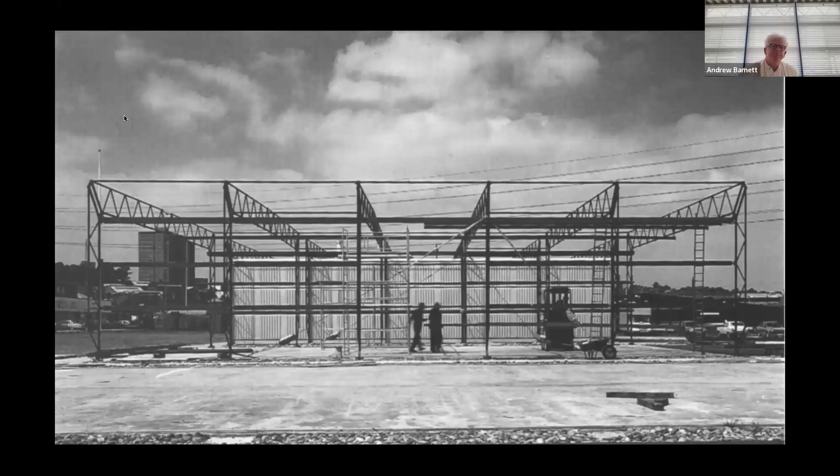This is not Eton and it's not timber, but it is our office patera system that we currently occupy. It's just celebrated its 40-year anniversary, and I thought it was quite interesting because in thinking about the project recently, it sets a whole number of themes, which is quite interesting to see how its genealogy has kind of lasted through 40 years of practice.

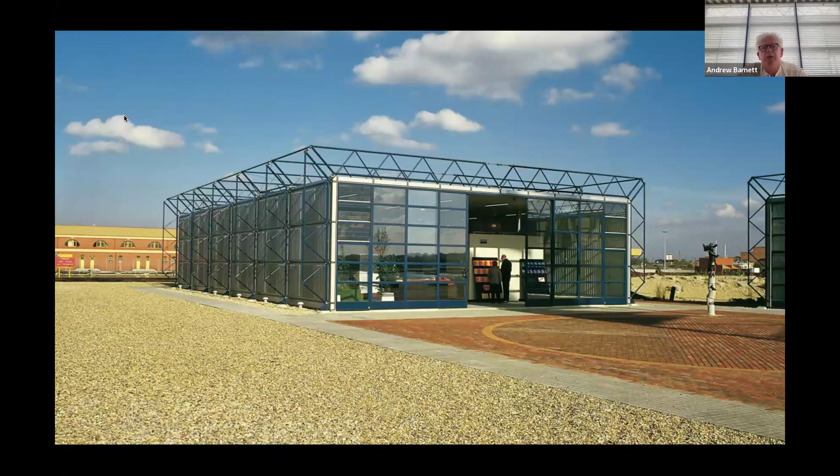So this was a patera system, light industrial system designed by Michael and Patty Hopkins in the 80s. It's a dry construction, everything's prefabricated, so it's a super accurate construction. It is a kind of simple rectangular box form, so that the simplicity of the form lets the construction read through, and the craft of the building becomes, if you like, the architecture of it.

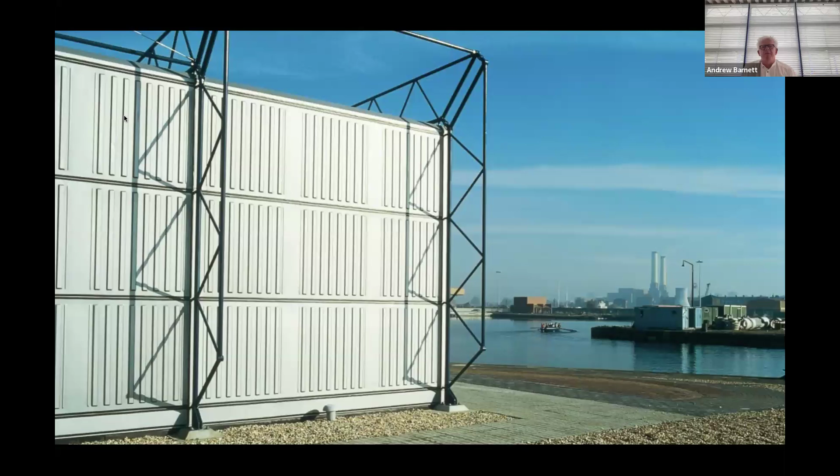It's also, this one was built in the Docklands, sitting right by the waterfront. I never visited this building, but Patty talks about how that amazing fully glazed elevation, so no punched windows either, it's just the glazing becomes an entire facade. And she talks about how it really unites the interior of the building with that waterfront setting. And then perhaps most importantly, the idea of that independent expression of structure and envelope, giving a real legibility to the way that the building has been designed and engineered.

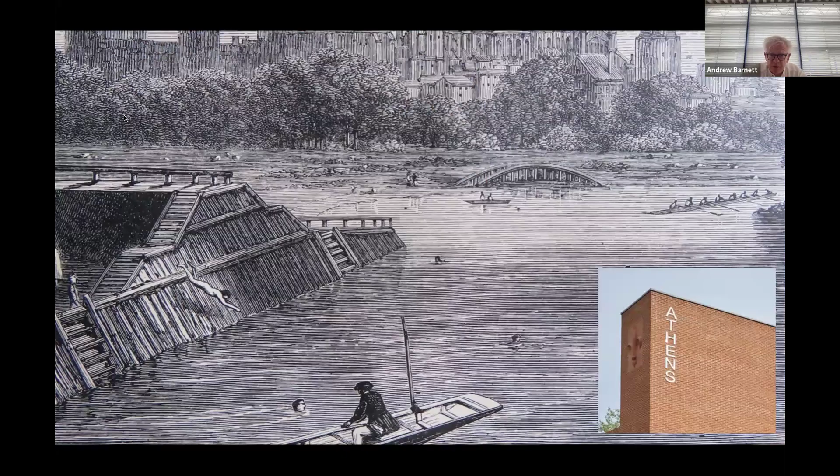So the story of Eton for us sort of starts with understanding a bit about the history of swimming at Eton. Back in the day, the boys used to swim in the Thames on a bend of the river called Athens. Hence, the name of our building now is called the Athens Pool and Sports Hall.

And then they recreated the bend in the river in this outdoor swimming pool. In this clearing in the trees, from the excavations from the pool, they created a bund or raised bank, which they planted to become this kind of private swimming place. But decades later they decided they needed an indoor pool, so they built that, which meant the old pool fell into dereliction.

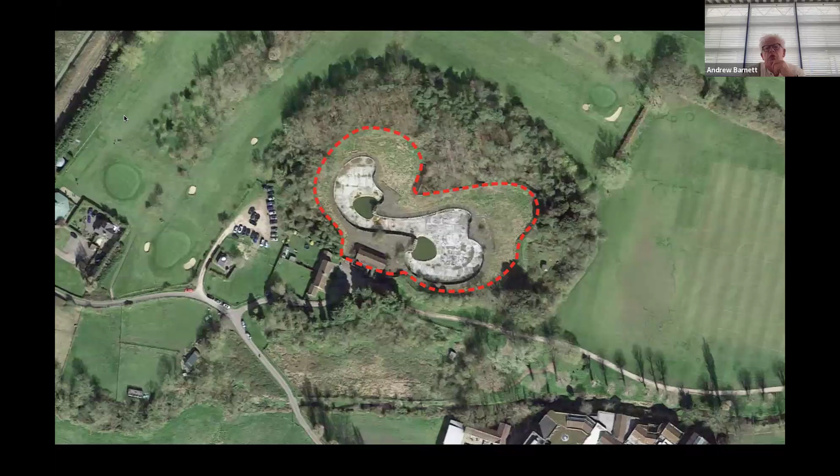And here it was, as we saw it when we came to the college. When we first visited, this was the sort of scene that greeted us, a deserted site surrounded by an overgrown landscape and a dried up, failing external pool.

But it did give us the idea of the excitement of discovering this site as a kind of lost garden, or a walled garden in a country house, where you walk through a threshold and find yourself in another kind of place with another kind of feeling. That's the inspiration of the overall design.

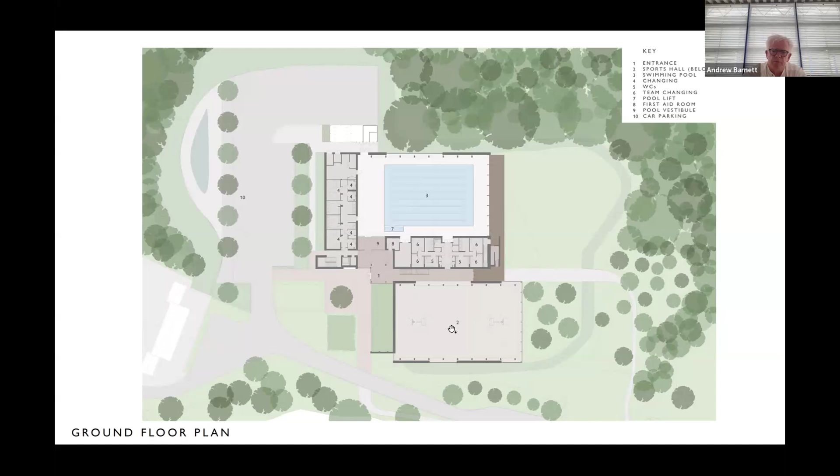The site is metropolitan open land, so that's when this idea of timber comes through. Building these big spanned spaces, we had to find a way to create an economical structure, building two flat roofs, sinking both volumes into the ground, keeping that roofscape below the trees, so the building is still effectively hidden from the outer landscape and environment.

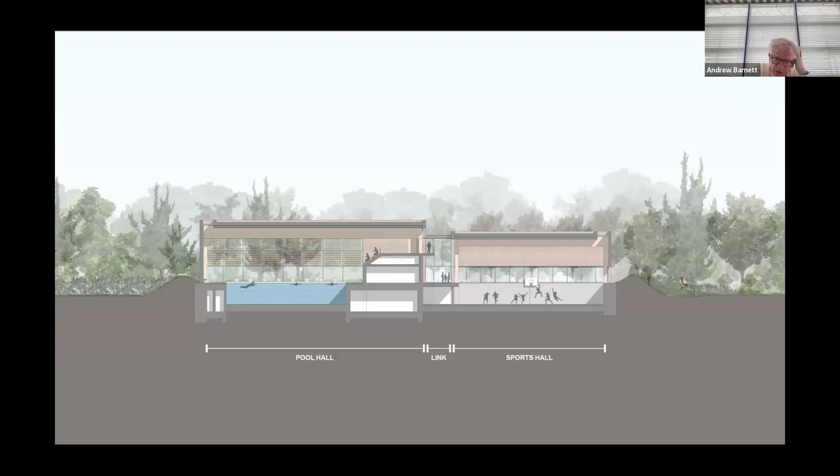The really nice thing about that was that the surface of the pool became level with the landscape around it, with a grand window between the pool and the informal garden, which you can see at the back of that drawing. There's a really nice feeling of connection between swimming in the pool and the landscape, which is of course a reference and memory to the idea of the external pool, literally swimming amongst that landscape.

This is the development of the form from simple rectangular volumes, split apart and slid apart, with that link cutting through it, with then a formal series of walls making a garden at the front, a stair tower and a lift tower, celebrating that sense of arrival.

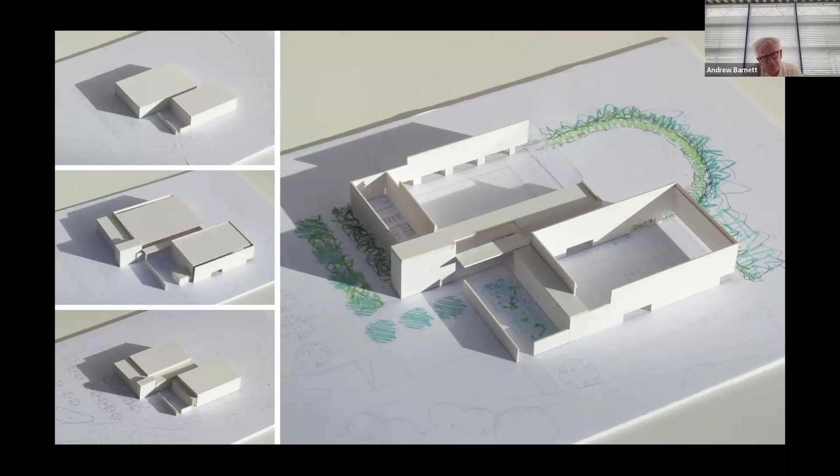And then the idea of taking these simple volumes in brick and cutting holes into them to enable that relationship to read through between the internal environment and the landscape around it. And here's the grand section through the building.

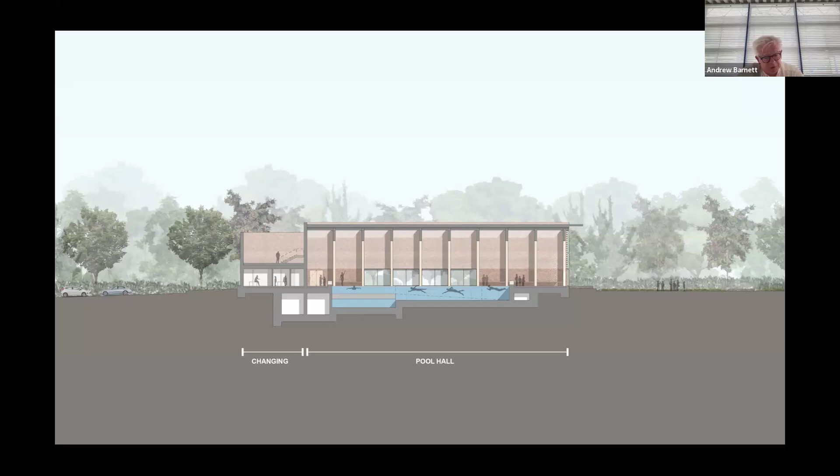These big double height columns through the pool, you can see it level with the garden. These big glulam spruce columns marching along the pool at 4-meter centers, forming this flat roof sitting below the roofscape. So really simplifying the building, like Patera in a sense, to these 3 or 4 elements: the structure, the glulam, the brickwork envelope, the glazing opening the building out to the landscape, and the landscape itself.

And so from concept and design to finished product, I feel it's a very clear development. You can see in this photo of the finished building the timber structure, these massive 1.6 glulam beams that span across the whole width of the pool, and then opening out that western elevation to the informal garden beyond.

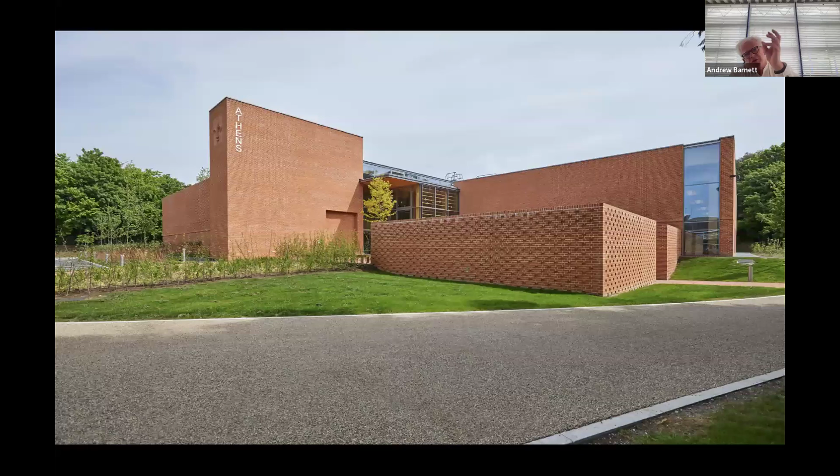So if it's informal and open on one side, it's a much more closed and solid building as you enter it. The idea of the stair tower marking the entrance, the sports hall slid back to make that front garden, where you get the first sense of the connection with the timber coming through, and that glulam structure marking the entrance to the building.

As you walk through, you get this double height space that links the front garden with the rear garden, and you get the grandness of the scale of the glulam structure, cut open at roof level with these linear roof lights to bring daylight and sunlight into the building, really animating what can often be in this typology a simple sports shed, but thinking about it as raising the environment of the pool and the hall.

As you rise up the stairs to the viewing gallery above, you get this really intimate relationship with the grand scale of structure that surrounds these volumes.

You can see the way sunlight animates the shadows and light on the brickwork wall, that thin line of sunlight between the glulam column and the brickwork beyond. You can see these brave structural openings we made into the brickwork, connecting the interior of the pool with the landscape bund, just newly planted in this photograph, now much more mature and green, keeping the relationship of swimming to the outside landscape surrounding the building.

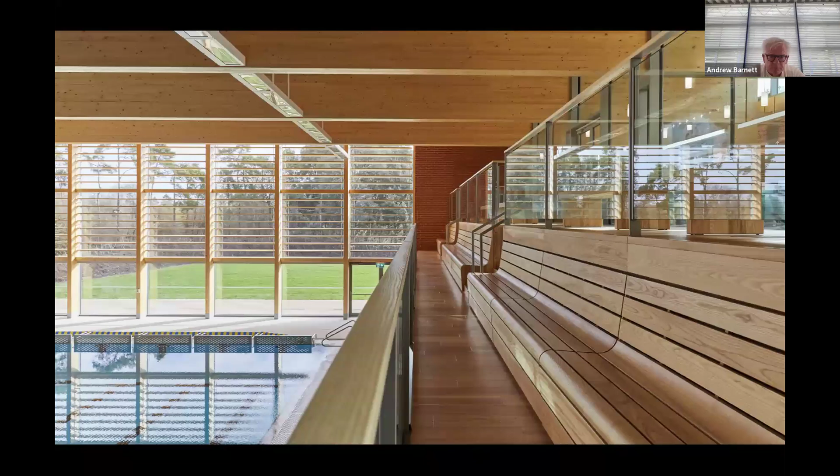The structural timber is obviously glulam, with CLT spanning between the glulam columns and beams. Then there's non-structural timber - these are ash, we made this ash seating for the gallery to look down onto the pool. They were inspired by Mersey ferries in Liverpool, which used to have these wonderful life raft benches on the upper deck of the ferry boats.

The link is this linear void between the two sporting volumes, which links the two garden spaces, but it also works in the opposite direction between the gallery above and the sports hall below.

You can see that it forms a kind of informal spectator gallery to the sports hall, from the upper deck to the cantilevered stair to the ground floor link. You get three almost free spectator galleries looking down into the hall.

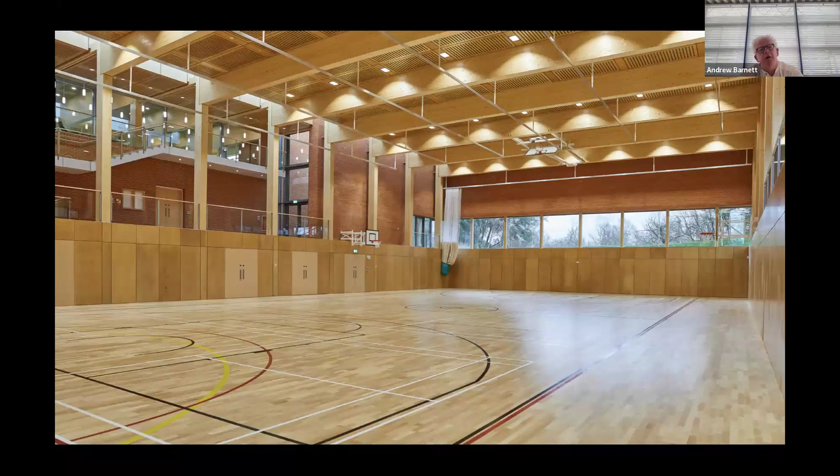The hall is sunken down, so it provides that birch face ply, giving a reflective surface for bouncing balls off on five-a-side football. And because that's at ground level, you get another window which looks out onto the landscape beyond and brings daylight into the heart of the building.

And finally, the informal garden, where both volumes really open up, finishing that story of the relationship between swimming at Eton and a green landscape. I hope what we've made is not some dumb boxes, but something intimately connected to both the history of swimming at Eton and its place in the landscape and the college campus.

Thank you very much. That's a brief intro to the project.

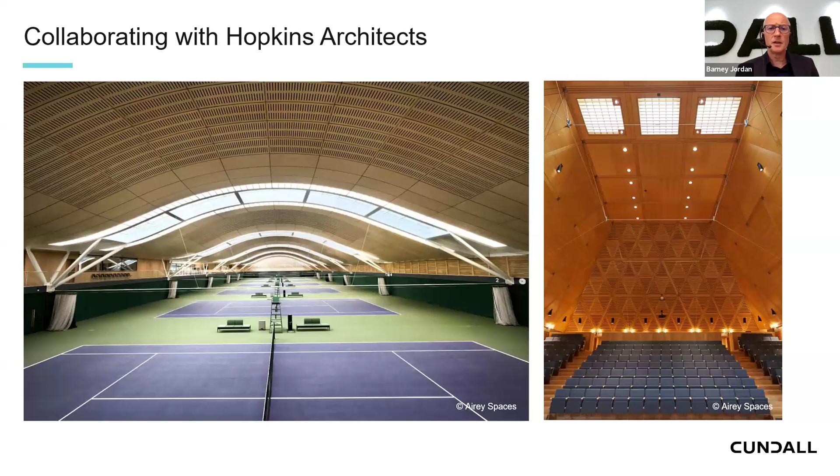I've worked an awful lot with Hopkins, an awful lot with Andy, and that's helped us develop a relationship that's been very helpful in delivering this Eton project. Just a tiny little bit about Cundall.

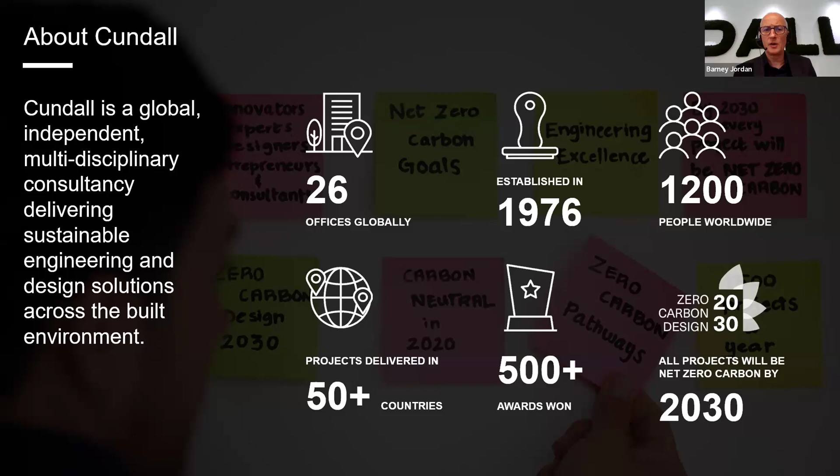We are over 1,200 people now, and we have 26 offices dotted around the world. In terms of disciplines, we offer a big range of basic core engineering disciplines, but also a lot of specialisms that have been utilized in this project. So in no particular order, we've done building services, acoustics, civil engineering, fire engineering, geotech, lighting, sustainability, and most importantly, structural engineering on the project. It's meant that it's been a really collaborative, multidisciplinary effort across the entire piece.

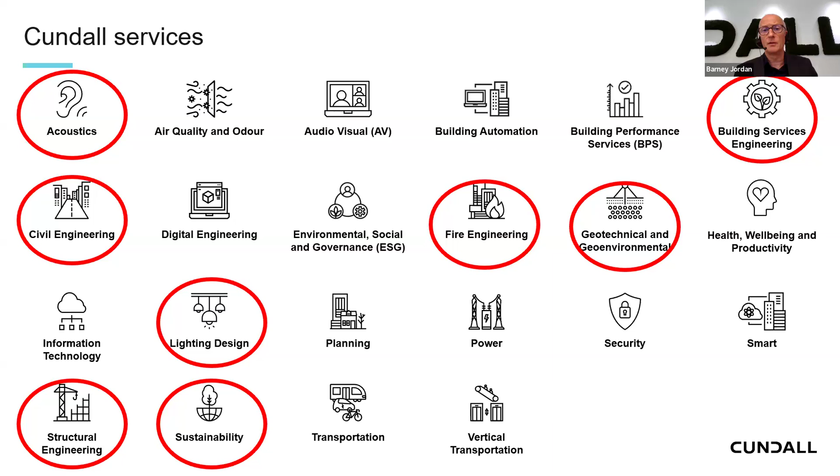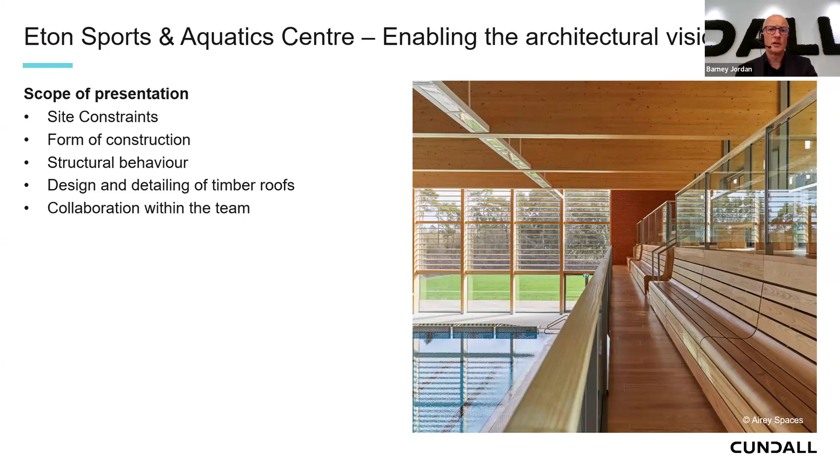Obviously this talk is mainly about the timber elements of the building, but I thought it would be useful to set the context, and what Andrew said is useful in terms of the overall vision for the building. I'll talk a little bit about the site constraints, the form of construction that meets those challenges, how it's designed structurally, and some of the detailing and design of the timber roofs. And most importantly, the fact that this is a team effort - we've had a lot of collaboration between the architecture, the contractors, the construction, and the engineering.

The site in Eton is a challenging one. It's near the river, near a number of rivers. It's in flood zone 3, which means it can fully flood, and we have to allow not only for today's conditions but what might happen due to future climate change. On top of that, there's a challenging geotechnical stratigraphy and a very high groundwater table in the area.

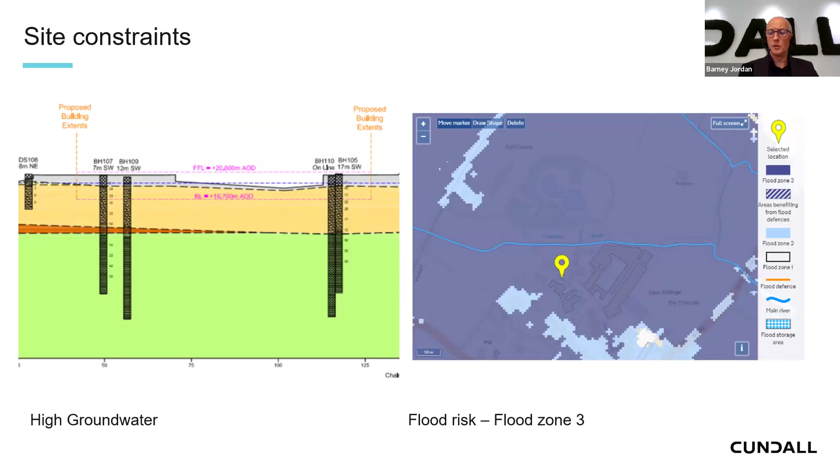This actually sets two challenges. As Andrew mentioned, the idea was to push the buildings down into the ground to slightly mask the building mass. But of course doing that has a number of engineering challenges. The first being in the long-term design condition for the building, we actually have to stop it floating out of the ground, and that's particularly pertinent with high groundwater level. In the event of a major flood in this area, the building would literally want to try and pop out of the ground like a boat. So that's one of the challenges we faced, holding it down.

The other challenge was to do with the fact that during construction, we had to excavate and remove the existing swimming pool structure, then dig a large excavation into the ground and keep that dry enough so they could build the new structure.

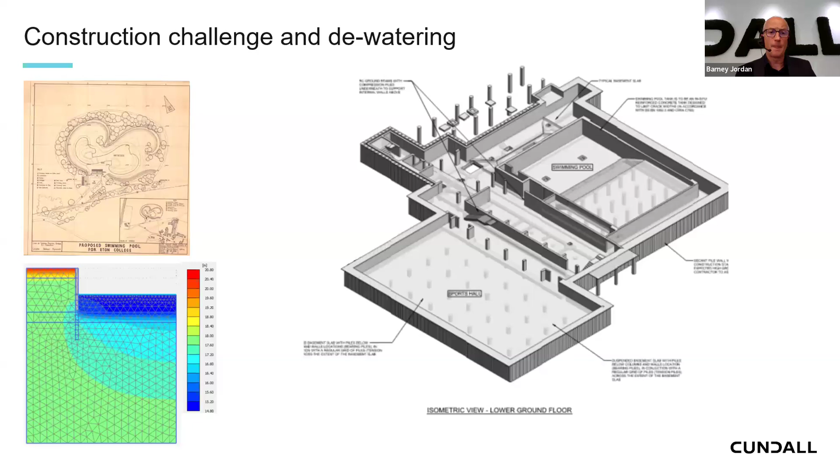The substructure is formed of a secant piled wall box. The piles go down to a stratigraphy that's basically fractured chalk. It's often in our region, southeast of England, that we get into clay, which forms a nice seal against groundwater level. But the fractured chalk actually means that water will continue to flow through the ground into the excavation as you build it.

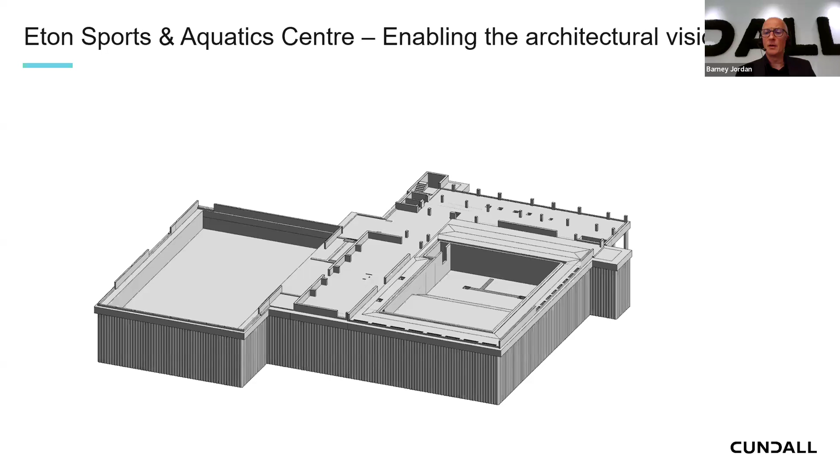To counteract this, the main contractor, Graham Construction, set up an array of well points across the building footprint. These basically extract water out of the ground and pump it to a remote location. Part of the Environment Agency's conditions on this was that we re-injected the groundwater back into the ground in well points remote from the site, so there's no actual net lowering or raising of the groundwater in this area.

Above ground, as Andrew mentioned, the facades of the building are largely punctured with big openings to allow light to come through and glazing to be formed. It's particularly noticeable that there's sort of a complete opening on the east elevation of the sports hall, and there's a very, very large opening on the east elevation of the pool and down the side.

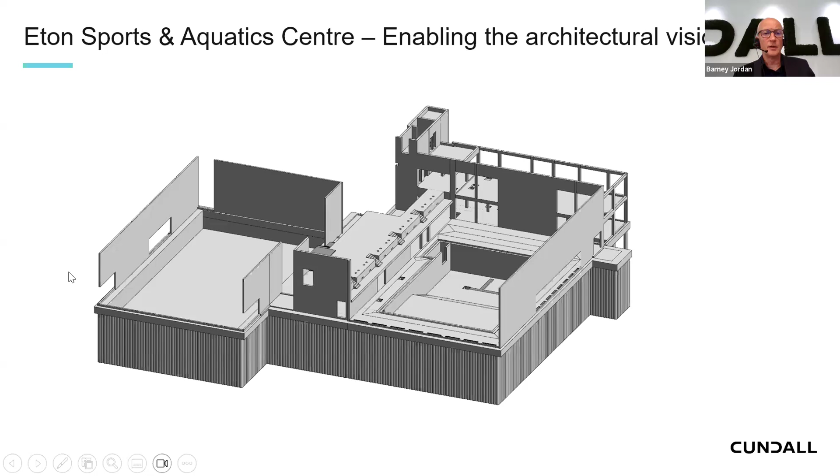To achieve this, we came up with a very clear structural diagram - we've provided thin, slender, reinforced concrete walls that not only restrain and support the brickwork but also act as shear walls to provide overall stability for the building. They also act as deep beams. On the right-hand side of the pool, there's a very large slot cut in the wall so it acts as a very deep beam to span over that. In the sports hall, these ends actually act as a deep cantilever.

The roof structure is formed of glulam beams supported on perimeter columns at approximately 4 meter centers. These beams act to laterally restrain the concrete walls about the minor axis of the concrete, and the wall in turn provides lateral restraint in the long direction, acting as shear walls.

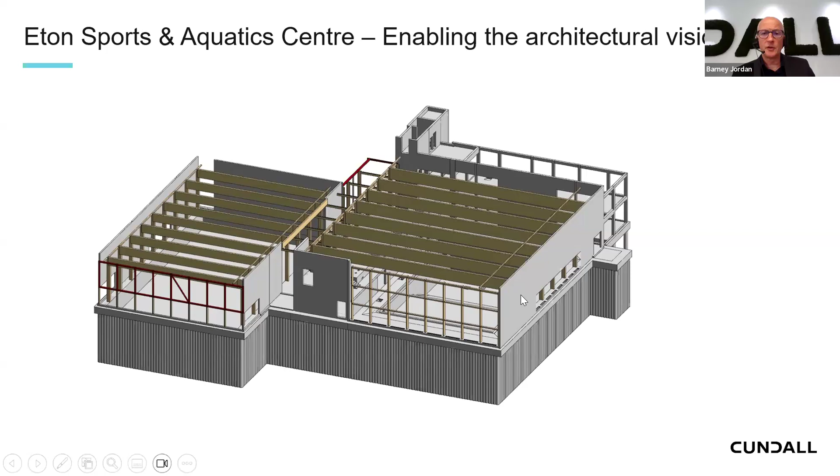The stability diagram for the pool and the buildings relies very much on the fact that you've created stiff walls to form a box and a rigid diaphragm to join all the walls together. For the sports hall building, this was particularly tricky because we've only got walls on 3 sides, which normally, a good stability diagram has walls on opposing faces, more like a big rigid box.

This diagram still works, but you do very heavily rely on the roof acting as a rigid and strong diaphragm. So as part of the design, we introduced in-plane bracing into the roof to help transfer those forces.

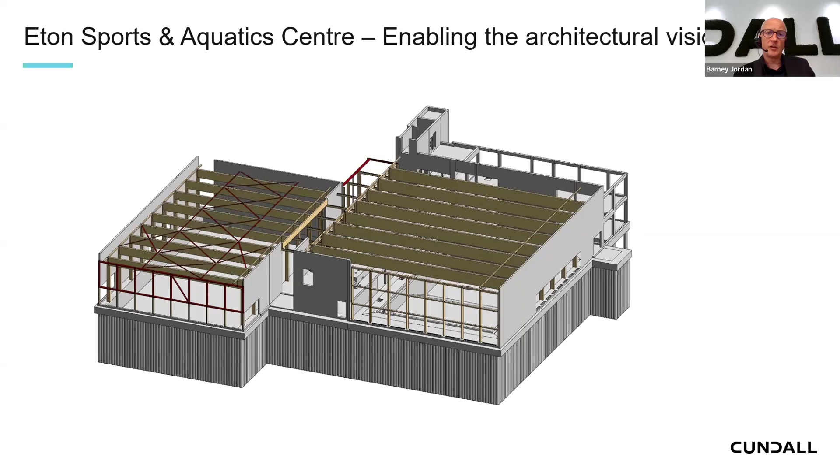Interestingly, once WIEHAG were on board as a contractor for these elements, we worked very closely with them, and we were able to justify the fact that the CLT roof panels were strong enough and especially stiff enough, combined with their fixings, to allow us to eliminate this bracing. That afforded a cost and program benefit to the project.

This image just shows the CLT roof panels in place. It's worth noting that the CLT doesn't always reach the perimeter walls, and there are large slots cut into the roof, which is also part of the rooflight glazing system.

Because the 2 buildings are effectively independently stable, we actually had to structurally introduce a movement joint down the link building that Andrew talked about. That came with its detailing challenges, as you can imagine.

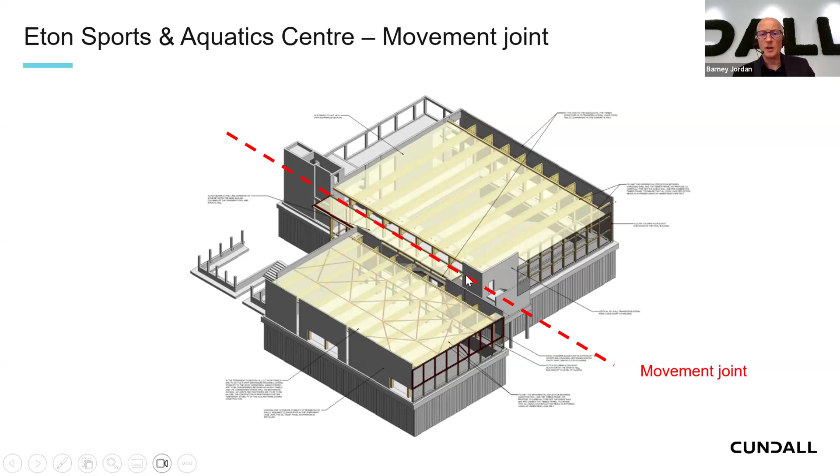Just talking about the different design conditions of the 2 buildings. Starting with the sports hall, on the roof we had a green roof, and there's quite a number of suspended sports equipment on the underside. So the roof had to be designed for the loading of that.

The environmental conditions in there are fairly benign actually, so it's a service class 1 design condition for the timber and corrosivity category C2. The pool, on the other hand, is very different. We designed that as service class 2 and corrosivity class 4.

The roof to this also supports an array of PV. It's worth noting that some of the timber actually passes from inside to outside, and there's a projecting cantilevered canopy along here, and also above the entrance area that was shown in some of the earlier images.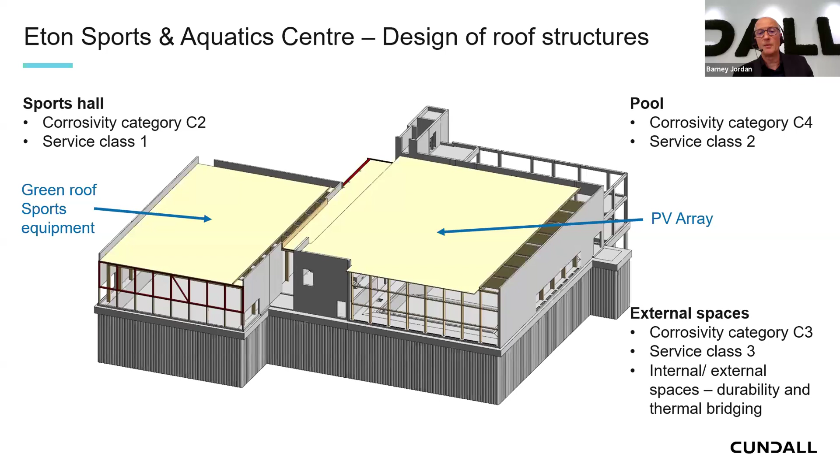Timber obviously is very good from this perspective because it's inherently durable, and it also doesn't suffer in the same way that steel or concrete would in terms of needing thermal breaks.

As I described, the stability diagram for the building, this is just showing the pool hall as an example, but it uses the shear walls around the outside of the building, the roof acting as a rigid diaphragm. This slot down the side of the building is actually structurally a bit challenging because the diaphragm doesn't actually meet the shear wall that it relies on.

So we actually had to design these glulam beams to take the diaphragm force in minor axis bending back to the concrete wall.

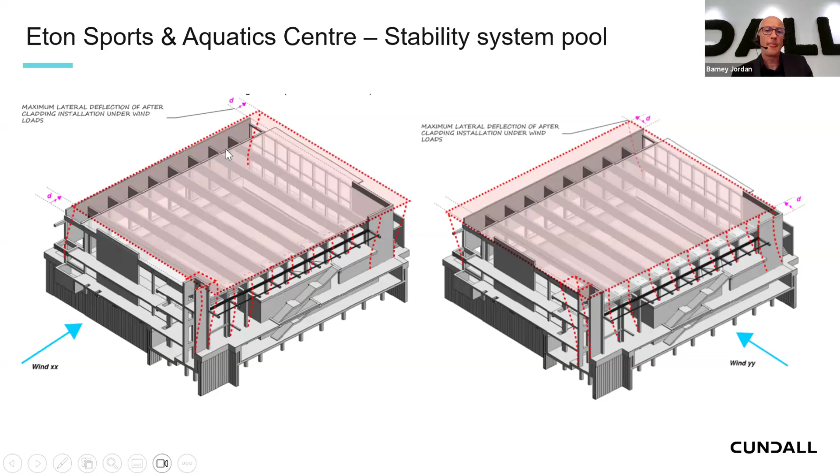This is just a general cross section across the two buildings. The sports hall is approximately 20-meter span with 80mm thick CLT decking on it. The beams there were 320 wide and approximately 1200 deep.

The pool hall is a much bigger span, 31 meters, with thicker CLT roofing on it. The beams there are circa 1700 deep. All the glulam beams and columns were grade GL28C.

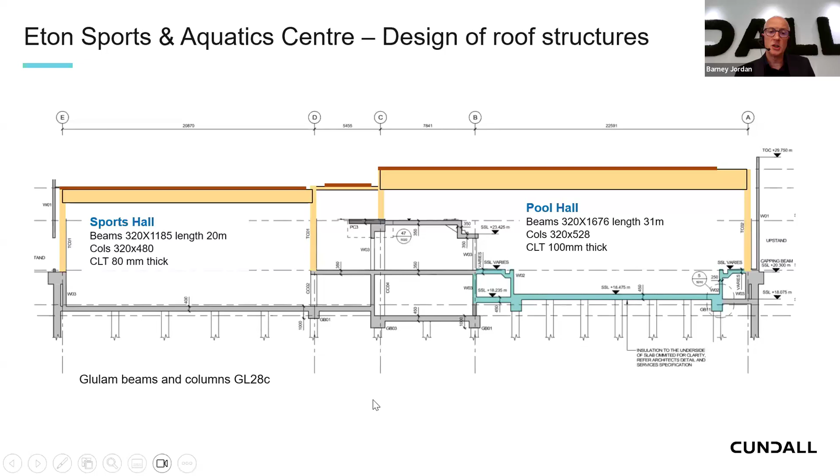I just thought it'd be worth talking a little bit about some of the detailing here. These drawings are from our design drawings. It's worth pointing out that post-contract, we worked very closely with WIEHAG to refine these details to suit their preferred methodology and also to take benefit from their specific expertise in how you join bits of timber together.

This detail on the left-hand side here shows the connection that Andrew was talking about, where there's a distinct gap between the glulam and the brickwork and the concrete wall behind. The way this works is the column has a sort of L-shaped rebate cut into it, which then means that the beam sits directly on that. The load from the beam is then transferred in bearing directly down.

The bracket detail that you can see here connects the concrete wall with the end of the glulam beam, but it acts as a lateral restraint to the concrete wall in the left to right direction, while the concrete wall acts as a lateral restraint to the glulam in the into-the-page direction.

Another subtle requirement is that whilst the glulam is laterally supported at the top flange by the CLT decking, we needed to provide torsional restraint to the glulam beams at the ends in order to resist lateral torsional buckling. This detail was the way that we did that.

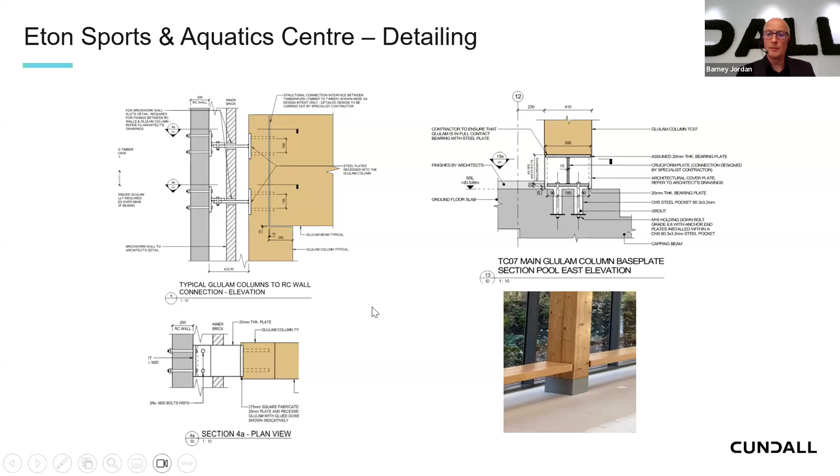The link building has a flat roof, partly CLT decking, partly glazed. They're supported on very slender flitched beams which span between the sports hall and the pool. At the interface with the pool hall we had to introduce a movement joint, which added to the complexity, but the visual intent we matched has worked very well in this instance.

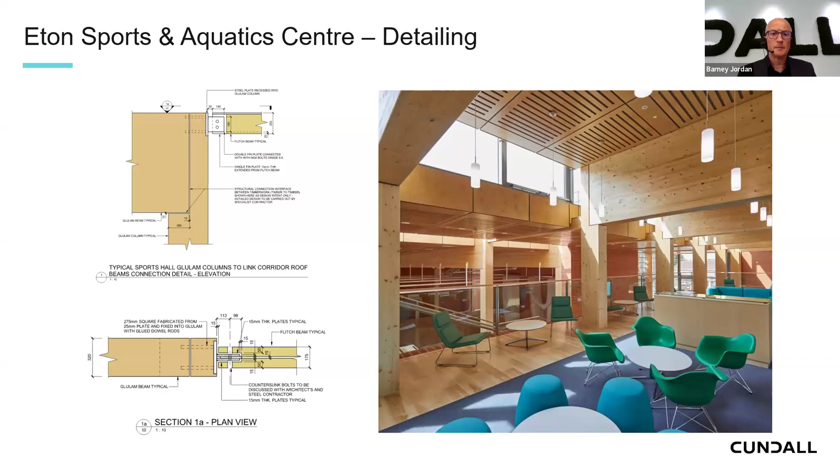One of the key structural challenges for us was actually working out how much these roofs would deflect at an early stage in their lives, and over time, how they would creep.

There are particular challenges where these interface with other elements of the building. Partway along the viewing gallery there's a full height glazed screen that interfaces with the roof beams, so we had to work out how much the interface detail would have to deal with in terms of deflection, tolerance, and all those sorts of things.

Calculating pre-cambers on these big timber elements is really tricky. It's part calculation, part black art based on experience, and we worked very closely with WIEHAG to come up with a strategy for pre-cambering. This photo, bottom left, shows the beam lying on its side - you can just about see the pre-camber that was needed.

The idea is that you erect the beams, put all the load on it, and by the time they come to install the glazing it's in a predictable position, and then the interface with the glazing can accommodate the further movement that will happen over time.

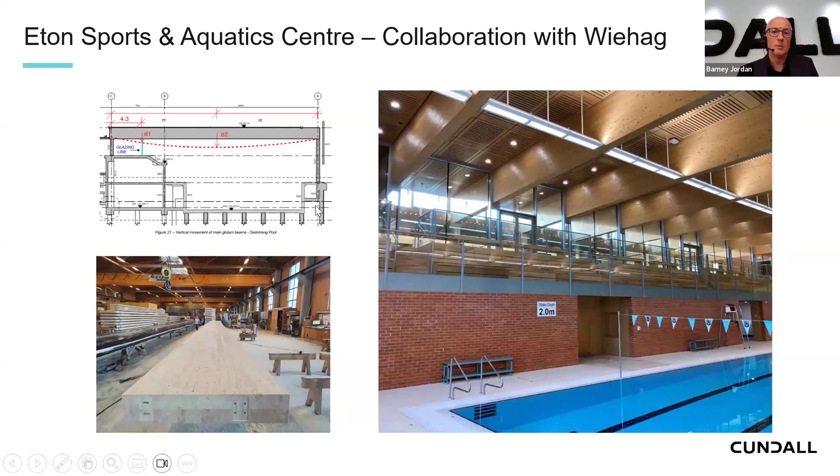I've mentioned collaboration with WIEHAG a lot, and it was really an important part of this project. Whilst we did all the initial design ourselves, when they came into the project - and I have to say they were very helpful even before they were in contract - we discussed material grades, exact section dimensioning, transportation and handling. John will talk a bit about this, but transporting a 1.7 meter by 31 meter long beam across a lot of Europe and then erecting it is a really challenging thing, so we had to understand if that could actually be physically done.

I've talked about diaphragm actions, connection design, pre-cambering strategy. The other thing they advised the design team on was the build-up and change of temperature and humidity in the pool building once the envelope is enclosed and the building has water in it, because you don't want conditions to change so rapidly that you cause splitting in the timber. So that was another aspect where we relied very heavily on their expertise.

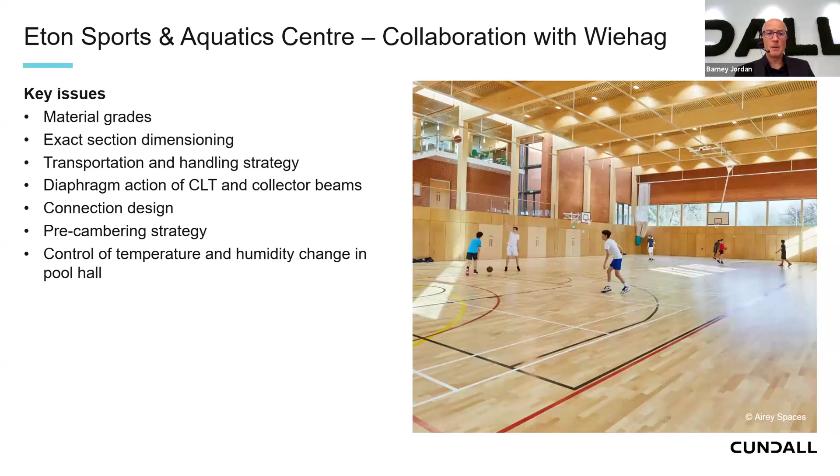At that point, I think I will hand over to John, who can talk about the WIEHAG aspect of the project.

Thanks, Barney. Okay, I'll just share my screen. Hopefully you can see my screen, everyone. Good afternoon, everyone. We can't see your screen yet. Oh, you can't? Oh dear, sorry. Hopefully it's working now. That's great, thank you. Sorry. Okay, thanks, sorry about that.

Firstly, a brief introduction to the company. WIEHAG, a long-established volume glulam manufacturer that started making glulam in the 50s, and by constantly pushing the boundaries we're acknowledged as one of the industry pioneers with this versatile product. WIEHAG is still family-owned and constantly reinvests in the business, as illustrated here on the right, where you can see we've recently put in a new 3-story office block and new hall, all in timber.

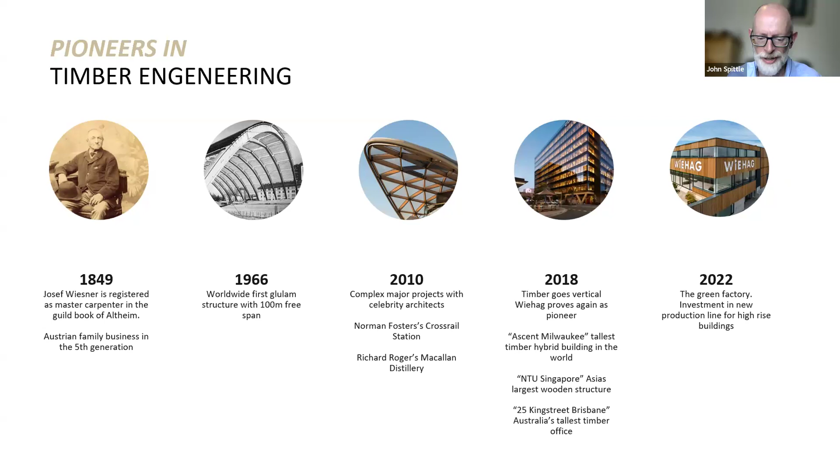This is our state-of-the-art factory in Northern Austria, situated near sustainably managed European forests, which enables efficient logistics and supply of the key raw material. Like most large European glulam and CLT manufacturers, WIEHAG has its own on-site power station which runs solely off our waste timber. This makes our entire production self-sufficient for heat, and over half our electricity comes from our on-site solar energy plant. Consequently, we're not affected by volatile energy prices to anything like the same degree as other products such as steel and concrete.

WIEHAG are not just a project management company or supplier. We offer detailed design, manufacture, supply and installation, and this includes providing cranes and chutes. This makes us look at a package in a much more holistic manner, which is really important for achieving successful completion on complex projects like the Eton project.

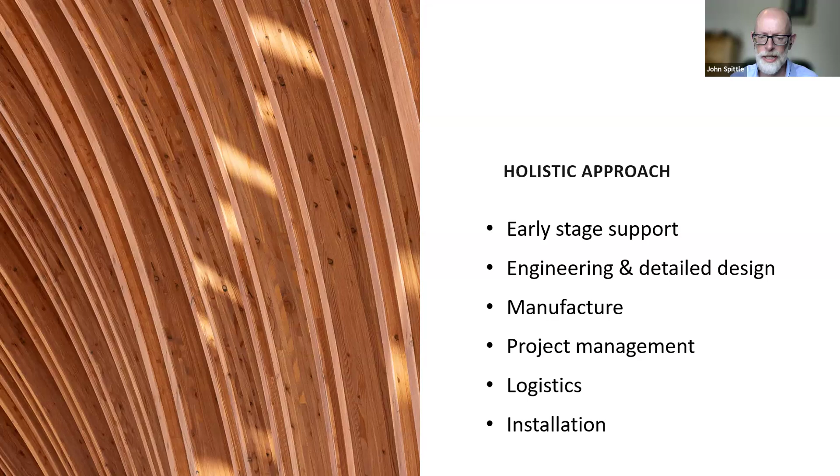We've been successfully delivering numerous groundbreaking projects around the globe in a variety of sectors for a good few years now, and we're constantly seeking to raise the bar in terms of scale and complexity, while still retaining core values like quality, safety, service and value.

Just to give you an idea of our capabilities, we simultaneously manufactured and delivered the glulam members and connections to both the largest timber building in Asia and the world's tallest hybrid timber building. All of this was carried out during the pandemic, with the added distraction of a ship getting stuck in the Suez Canal.

Introducing the package that we did, the scope really. Andrew and Barney have talked through the architecture and engineering, so I'll touch on other aspects of this great project. As Barney has touched on, the importance of having the right team - and for this project, it really was spot on. In addition to the collaboration, the early engagement of key subcontractors, such as ourselves, really did help the project in spite of all its challenges.

I think it was late 2018, we began providing initial design and cost input to the team and assisted them in developing the design. Then there was a really rigorous tender process, ending with us being appointed with Graham's in early 2020. We then commenced the detailed design process in collaboration with the design team and Graham, and this included providing a large scale mock-up of the glulam and the CLT.

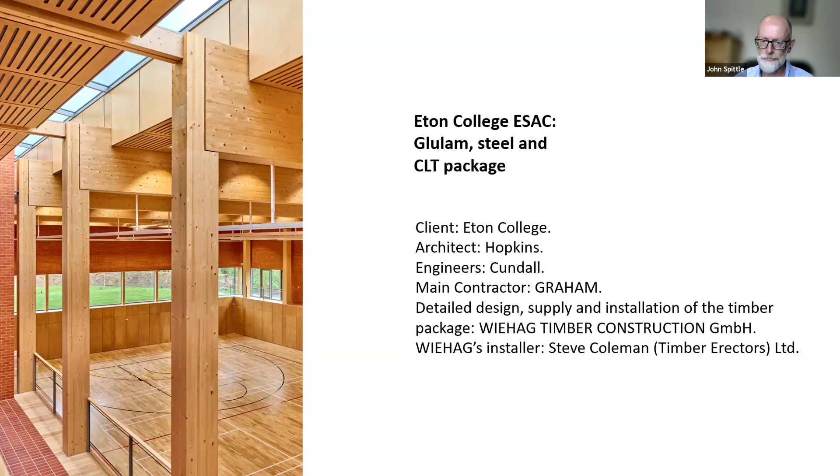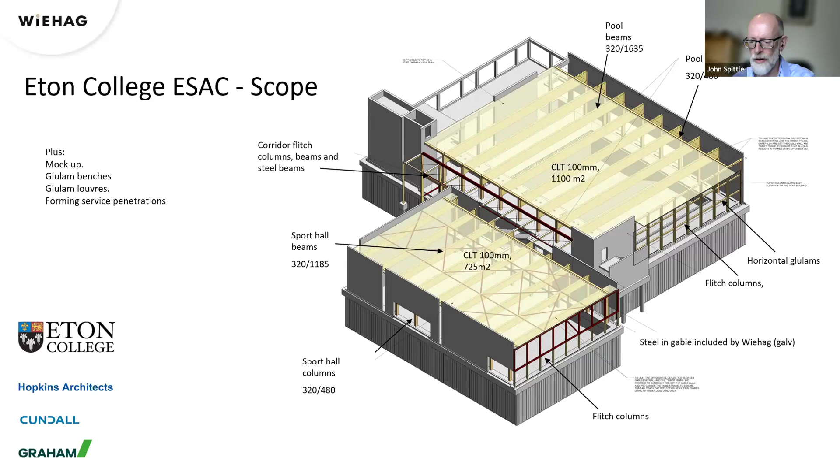The scope of our works consists of the detailed design, supply and installation of the glulam columns and beams, CLT roof slab, the glulam benches and louvres, plus steel members, including the hybrid flitches.

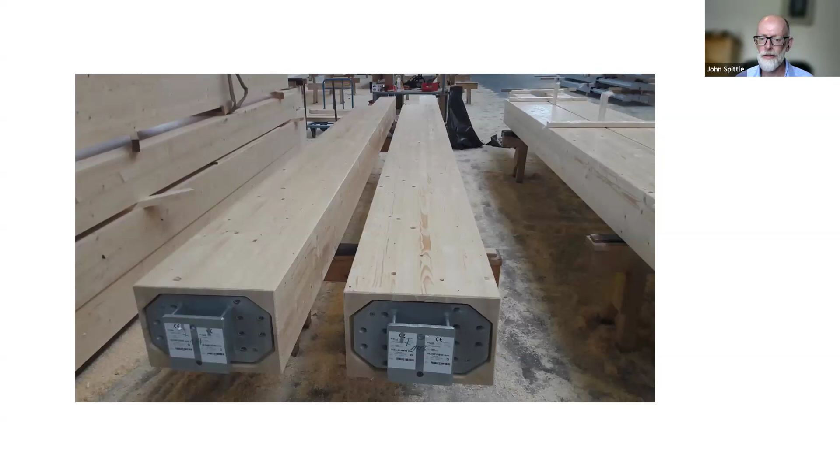Maximum prefabrication was used on all components, with all metalwork connectors and flitch members being factory assembled, and roof beams included factory-made notches to incorporate the M&E services. As illustrated here, this results in a really high quality and high tolerance product, much more than can be achieved by assembling these on site, as well as enabling very fast and safe installation.

So really the package comes to site like a giant IKEA flat pack kit. However, it's important to note that this is an industrial product - not a piece of furniture grade joinery - but we think it's the highest quality that can be achieved using such industrial processes.

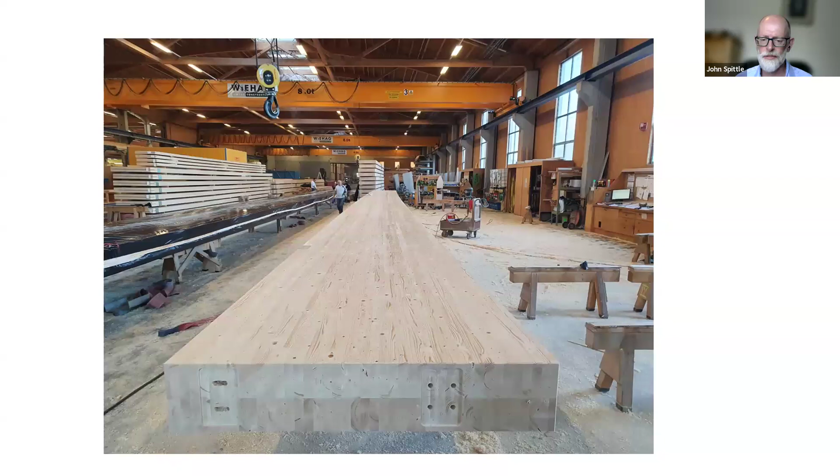The timber package comprised about 275 cubic meters of glulam and 170 cubic meters of CLT, and this is all delivered in only 15 lorry loads on a just-in-time basis to suit the restrictive nature of the site. Really, using off-site construction greatly reduces the amount of transport journeys, as well as reducing the number of site operatives, and reduces noise, dust and waste. This is really vital on a live education site.

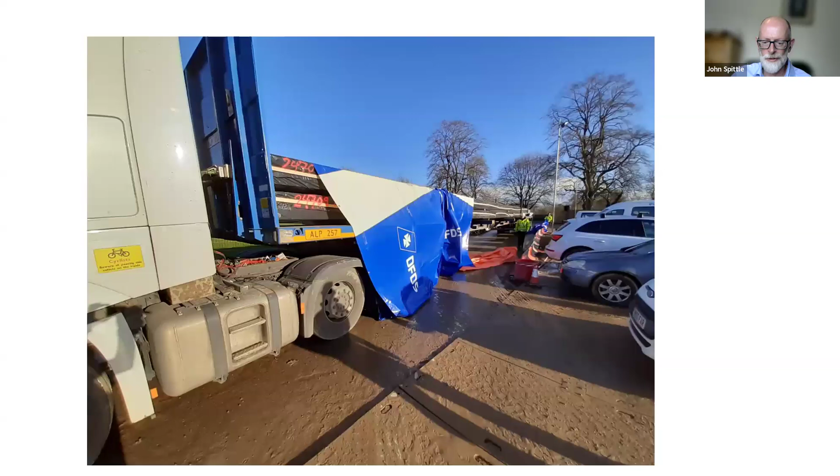As Barney has mentioned, the longest elements were these 8 glulam beams over the pool roof, and they were just over 30 meters long. This really highlighted how for each project, logistics and access must be considered at an early stage to ensure that they can be safely delivered and installed.

Delivering to this tight site was really only possible with close collaboration with the whole team, including our logistics partners, which in this case were DFDS Special Logistics.

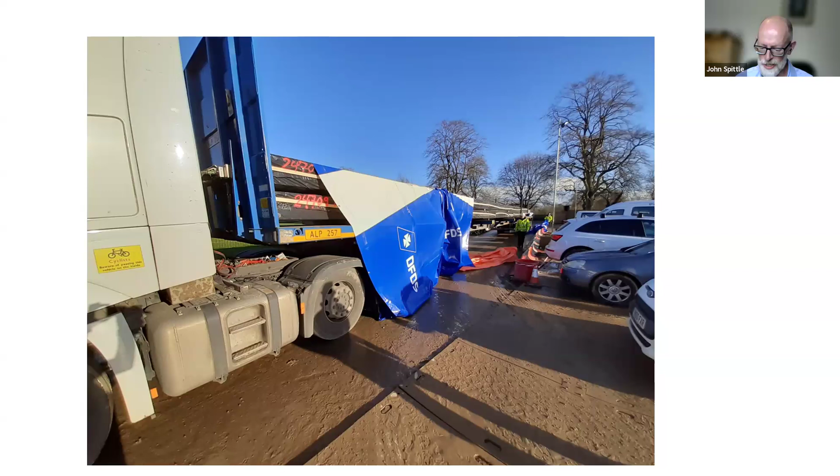The delivery and installation started in late November 2020 and was completed in February '21. So apart from taking place in the winter, it also took place during the Brexit transition, which was quite interesting, but we succeeded in that - and also during the full pandemic lockdown.

We were only able to successfully achieve the installation by working closely with Graham's, our installers, logistics partners and suppliers.

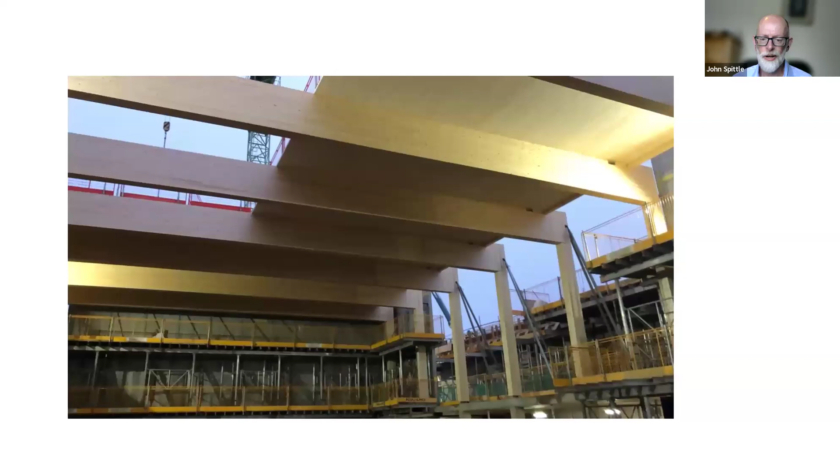The structure also included concrete walls, which have different tolerances to the timber package. So the sequencing and interface had to be really carefully managed between the different packages by the team members to ensure seamless, safe installation without damaging each other's product.

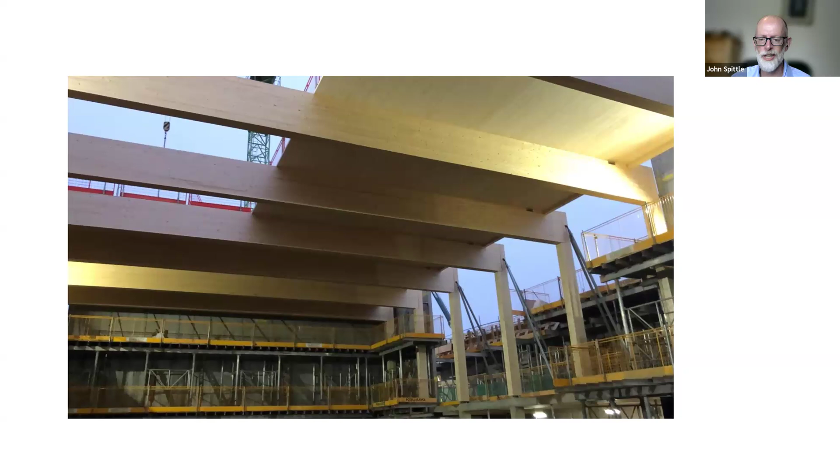There's no point in making a good product if it's not installed properly on site. So WIEHAG ensure we only use the best installers. On this project, Steve Coleman did a great job, especially considering the various challenges that the pandemic brought, and Graham's management on site during the installation really was vital in making this happen.

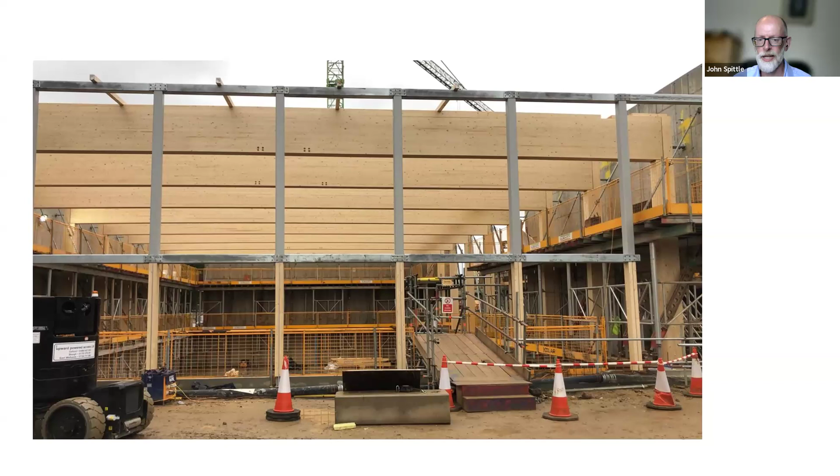WIEHAG also provided the structural steel package, which, as well as meaning there's only one warranty, gave the whole installation process much more efficient. This included the factory assembled steel timber flitch members, and by assembling those in the factory, it gave a really good quality finish.

Glulam has always been a go-to choice for roofs in aggressive environments such as swimming pools, because of its natural resilience, and it doesn't require expensive coatings or claddings, but it's still subject to a number of factors. The timber package, as well as the external roof and wall build-up, have to be properly detailed and installed, and the correct environment must be maintained in the pool hall throughout the year, and a maintenance regime must be followed. If this doesn't happen, problems can occur.

It's often wrongly perceived that engineered timber products are high maintenance, but for projects like this, where most of it's in service class 1 and 2 environments, maintenance is generally limited to just yearly visual inspections for the entire design life of, say, 50 years. To assist in this, we created an extensive O&M manual for each project to help inform the end user on how best to commission and maintain the building.

These inspections are vital. It's a bit like when you're at home - if you notice a leak in the roof and deal with it promptly, the effects are minimal. But if you leave it, it just gets worse.

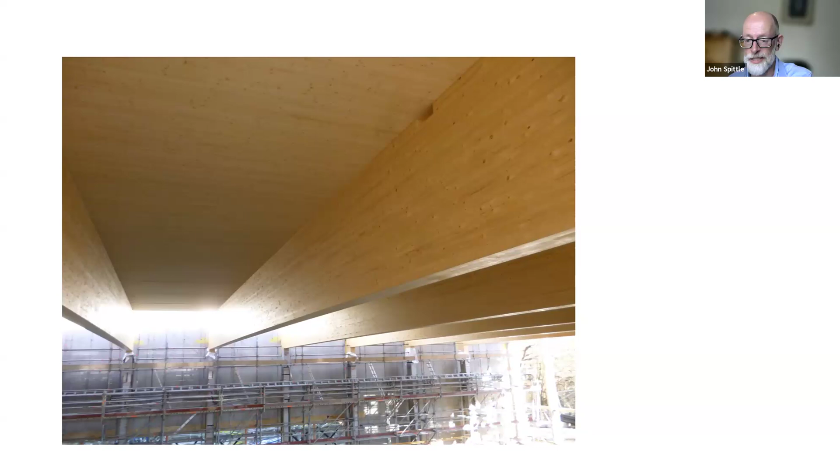Moisture ingress during installation is probably one of the main challenges with this form of construction, and it can't just be down to one member of the team to solve. WIEHAG put a lot of energy into their part of minimising this risk, and this takes the form of various temporary protection measures, including coatings, wrappings and taping joints.

As soon as WIEHAG had completed their works to each area, the roofer puts down the VCL, making sure that it's applied on a dry surface. More recently, WIEHAG have started putting factory-applied membranes, products such as WetGuard, on the top surface of all CLT floor and roof slabs as standard, and this offers an additional level of protection.

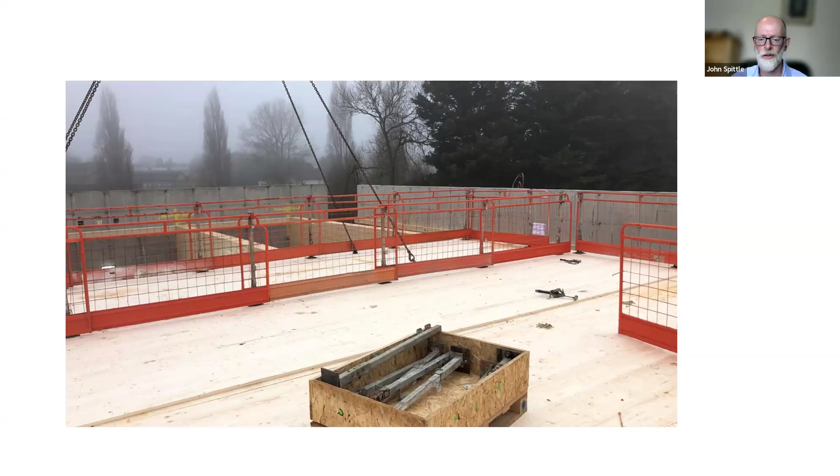You can also see here how barriers are fitted to the CLT slabs on the ground so that they instantly provide leading edge protection once the slab is installed. Hopefully this helps demonstrate how WIEHAG don't just get involved in the structural design, but also put a lot of effort into detailing and building physics of the structure, and this helps ensure the maximum lifespan is achieved with minimum maintenance.

Due to the nature and setting of this new structure, quality and finish of the product was of paramount importance, as most of the timber structure would be left exposed. We're only able to meet these high expectations of Hopkins and Cundall's design through the use of off-site products. We just wouldn't be able to achieve it through traditional methods.

Fire is rightly perceived as being a major issue in building design. So on this project, the client appointed Cundall to provide guidance on the subject. They advised that the timber structure did not need to achieve any fire resistance as it just supports the roof. However, each project is different.

On other projects, WIEHAG have designed their packages to achieve 30, 60 or 90 minutes fire resistance. This is economically achieved without the need for coatings by oversizing the members to create a sacrificial charring layer and encapsulating connections within the timber. This method of calculating predictive charring comes out of the Eurocodes.

We proved it again recently by doing some testing on an 88-metre high apartment block in Milwaukee, where we had provided the glulam and connectors, and had some 19 stories of glulam and CLT. To address the concerns of the local fire officer and the team, WIEHAG's glulam samples were subjected to a formal 3-hour fire test, which they all successfully passed.